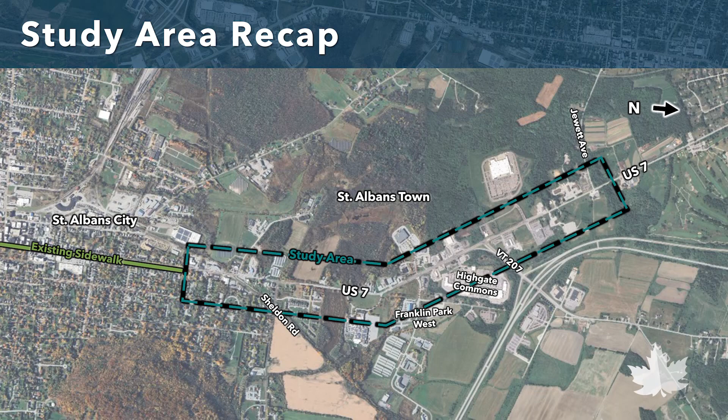The corridor, as likely all of you know, is quite variable along its length. You have dense commercial down here in the southern section as you're coming out of the city, as well as up by Highgate Commons. You have agriculture, lower density in the middle, and then you return to those land uses minus the sizable commercial development of Walmart as you continue north.

So you have a much wider road. The road almost expands and contracts as you continue along. You have a lot of lanes down here, it gets narrowed down to 2 lanes, widens out, multiple lanes, and then concludes getting narrower. So it's a very variable cross-section, and that certainly comes into play when we're looking at what alternatives we are considering for better connectivity and better safety for walkers and bikers.

And so one of the first exercises we like to do is just confirm our understanding of the study, and that's by looking at what the intention of it is. This study came to us and it was called a shared use path scoping study, but it's always important to check and make sure that you're right sizing the facility that you're creating or planning or studying for your active transportation users. One of the quick checks for that is in the national standard for bike facility design.

They have this little table in there, and this is in the AASHTO Bike Guide. The AASHTO Bike Guide is the national standard for bike facility design, and when you think about shared use facilities, it has that overlap with pedestrian facilities as well. So it includes this tiny little table that's based on the volume of cars along your roadway as well as the speed. And when you look at our metrics for Route 7 in the study area, the speed limit is predominantly 35 until it jumps up to 50 once you get north of Walmart.

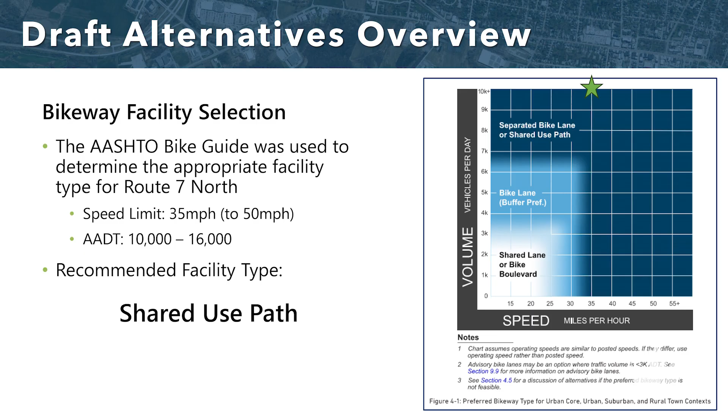And along its length, the AADT, which is basically how many cars there are on average on the road per day, ranges along the study area from 10 to 16,000. So when you use this tiny little table, you go to the 35 miles an hour and you go to the top of it, which says 10,000 plus, and that's putting you firmly in this shared use path or separated bike lane category. So that was just a little check we did to make sure that, yes, along our study area, when we are talking about alternatives, what we're going to be talking about is a shared use path.

For those that might not know necessarily what a shared use path is, if you can picture the MVRT, if you can picture the LVRT, it's generally a minimum of 8-foot wide path that's on an independent right-of-way or immediately parallel to the road, but is by some means separated from the road. It's not a bike lane that's also striped on the pavement. It's not a shared lane where you're biking with traffic. It's on its own alignment, separated from the road, either horizontally or vertically. So that's just a high-level understanding of a shared use path.

And so when we kind of zoomed out and looked end to end, knowing what we were going to be talking about was a shared use facility, we kind of eliminated those alternatives. That would be like, oh, what if we did bike lanes and sidewalks? What if we did just bike lanes? What if we did just sidewalks? None of those quite met that purpose and need and followed along with that table I just shared. And truly, too, to meet the needs of the grant application with the state, it needed to be a shared use facility. You need to accommodate walkers and bikers. So that's how we arrived at the shared use path.

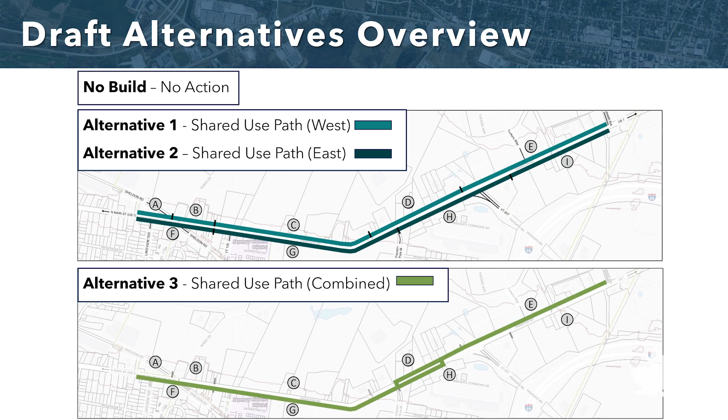And when you look at what is available along the corridor, the other thing was that we were to hopefully travel along Route 7, as that is the most direct route. And so really that made our alternatives analysis somewhat straightforward. We decided we were going to look end to end at what a shared use path along the west side of the road would look like and a shared use path along the east side of the road. So we kind of came up with this segmentation that you'll see in later slides, how it plays out. And then we looked at how a combined alternative would potentially perform relative to the corridor end to end.

So the goal of this exercise is to identify a shared use path separated from motor vehicle traffic that was, generally speaking, the most desirable. And so in terms of desirability, we evaluated these different segments and kind of color-coded them here on the scale of desirability based upon constraints, impacts, and benefits.

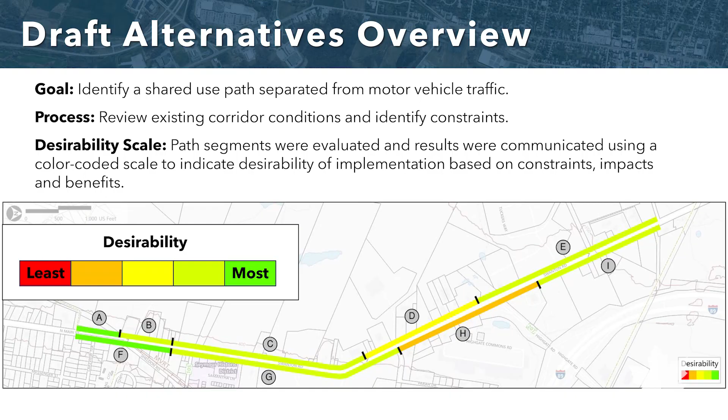So constraints as it pertained to right-of-way, sensitive areas, impacts similarly, minimizing or completely mitigating impacts to right-of-way, always a goal, staying within the public right-of-way, minimizing impacts to natural or cultural resources. So as part of all of these studies too, we do historical resources assessments, we do archaeological resources assessments, we look at those elements, and then we look at the benefits. Are we connecting folks on either side of the road or either end of the corridor to the right things? And based upon what destinations might be on which side of the road, that's certainly paramount in this analysis.

So the first alternative we looked at was an end-to-end shared use path along the west side. And so what I'm going to do on each of these next 3 slides is just kind of walk down and share a high-level look. As I was describing earlier, the corridor is really variable as you move up it, and that's what kind of informed our segmentation of it. And so when we look at these different areas, we've kind of associated a little icon with an image. I apologize if this is a little tricky to see for those in the back. Again, you're welcome to come forward, and I can go back to slides if you want to see a little bit more detail.

But what we noticed in the kind of southern section here was a lot of excess pavement. There are buffered bike lanes on the road in very short segments. We heard in the first meeting that those aren't terribly utilized. It's not that surprising given the speeds along Route 7, given the volumes. While those facilities are there, as I shared in that little table, they're not necessarily the right size facility. So they're a great idea.

It's nice to reallocate that paved space, but because they're not separated from the number of cars that travel along the road and the speed at which they travel, users generally just don't feel safe or comfortable utilizing that facility. So based on the feedback we heard at our first meeting, those are relatively underutilized. And also there's space that, albeit within the public right-of-way, is utilized for parking for local businesses. Obviously something we're always going to be sensitive to, whether or not it is in private or public right-of-way, something worth being sensitive to.

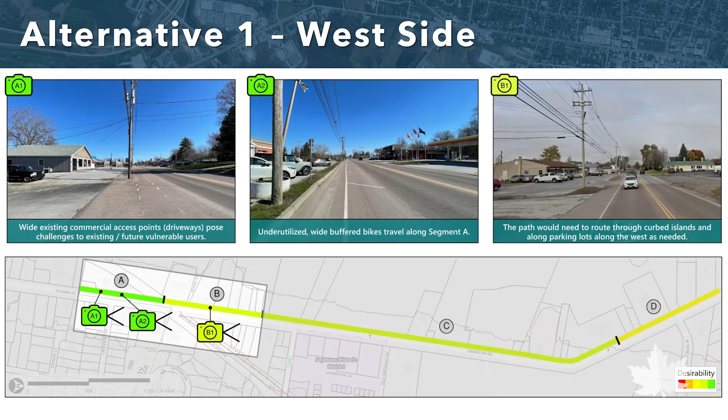And then just looking at the utilities in the area, there's above-ground utility poles down this whole section. So how can we fit the path here by reallocating roadway space or minimizing impacts to those utilities or the kind of the uses of the right-of-way outside of the road? So that was the challenge in that southernmost section.

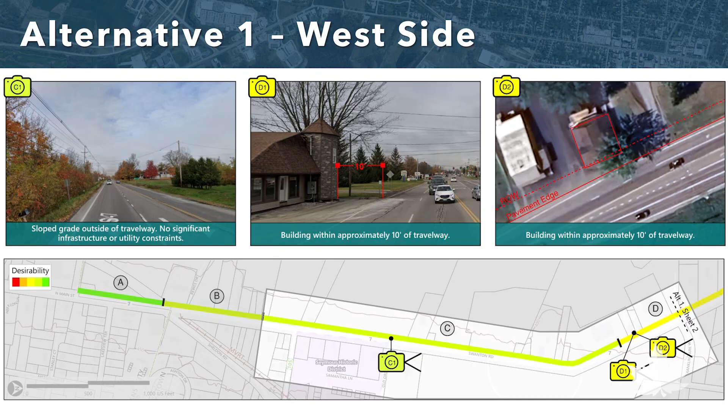In the middle section here, the roadway changes quite a bit. We go down to a 2-lane section with the exception of the 105 intersection where we do have a left turn lane, so it's a 3 travel lane section. Narrower roadway, narrower shoulders. There are some encroachments very, very close to, if not within the public right-of-way. Generally speaking, buildings are not something you'll see that close to a right-of-way line, but that's obviously something we are not going to move. So something to be sensitive to as we consider a west side path that stood out to us.

Again, just little snapshots along the corridor because at this point in a study, the goal is not to design a facility, it's to investigate and evaluate a facility. So those are a couple of the notes we made. There's a lot of ditching through this section on both the east and the west side of the road to just kind of accommodate stormwater and transfer it to the west side of the road.

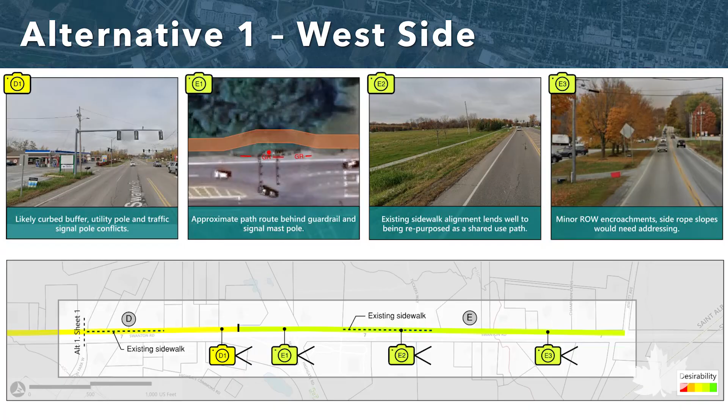Continuing north, kind of looking up into Highgate Commons, that 207 intersection. We have a little bit more space when we get north of 207 relative to different pieces of infrastructure, the right-of-way. At the 207 intersection, we obviously have traffic signal infrastructure. We have a lot of utilities, signal poles, driveways through this section where we have this first image. Something to be mindful of for that west side, how many cars are going to be turning in to access these commercial destinations, these local businesses, and crossing a shared use facility.

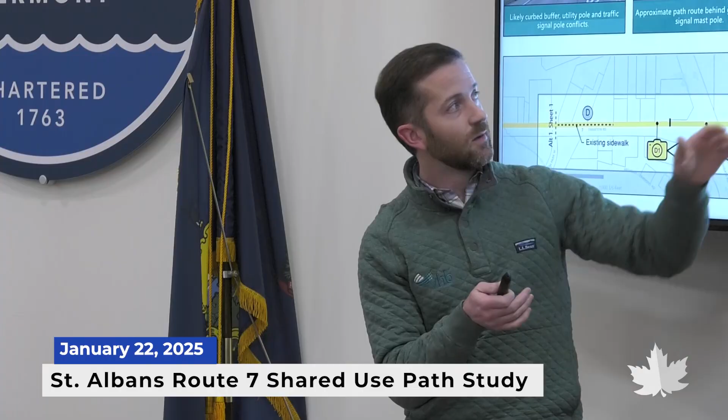What happens when we get north of all this and that land use context kind of transitions back to a little bit more rural? We get a little bit more space. The Walmart development built a sidewalk when that was constructed. And then what are we looking at as we continue even further north? An even narrower roadway. Same concerns though, utilities, trees, etc.

So what does all that mean when you're thinking about putting a shared use path along those sections? We develop these visualizations to really kind of put into place what we're talking about here. So this shared use facility, again, we have it shown to scale here at 12 feet. It's important to note that the width of that can vary.

So if the project were to get funded to move into engineering design, the width of the path is always something that they consider. Can it be narrowed to like a minimum of 10 feet if there's a sensitive resource or a potential sensitive property impact? Could we shift it around a utility pole to avoid a relocation? Those are all things that are a little bit further down the road, when you're into engineering design and you're considering impacts to existing elements of the right-of-way.

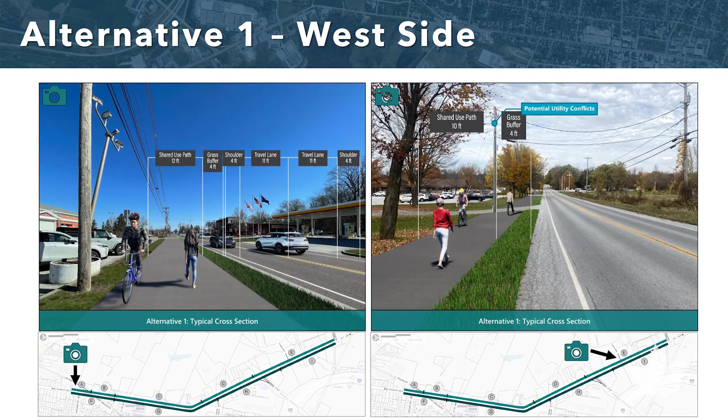And so this snapshot down here is right in the southern end of the property, right in front of the Hungerford Plaza, approaching the old newspaper building and the MVRT crossing, just right up here. You can actually kind of see a little warning sign right there just to place yourselves.

And then more up in the north here, we're pretty close to the northern end of our section. You can see here we've called for a narrower path just because of the number of trees up here, the utility poles, all things that, again, will be considered if the project were to advance with a preferred alternative. But just looking at, can we maintain that acceptable width of the shared use path, that separation from the roadway, and still successfully and reasonably, feasibly say a shared use path could work here. So that was alternative one.

Alternative two, same kind of typical section with a separation from the road, looking at the same sort of things along the east side. So very similarly to the west side option, the east side, in the southern section here, would be existing within what we call curb to curb. So you can picture that as the existing roadway. That's what we would seek to do there. As we continue north, looking at, what is access to businesses like through these areas?

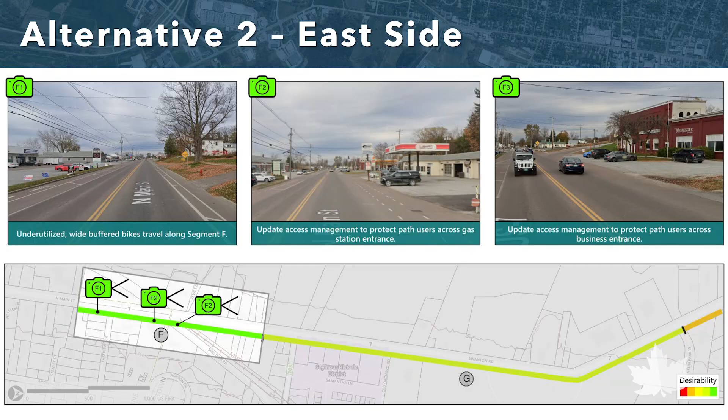Are there a lot of driveways? Are there a lot of intersections? This Sheldon Road intersection, it's known that there's a fairly high speed movement made off of that. How can we plan around that? Not really something we look at here, something that would get more into engineering design, but just something to be mindful of and identify as a potential constraint through here.

The connection to the MVRT, really nice for something like an east side path if you're coming up from the city and you can just jump right on that, staying on the same side of the road. Potential benefit of the east side option through here. Continuing north, more the same, not too much variability in this middle section between both options, where you have very similar adjacent land uses. And on the west side down here, you have a few additional private properties before you get into more large-scale lots.

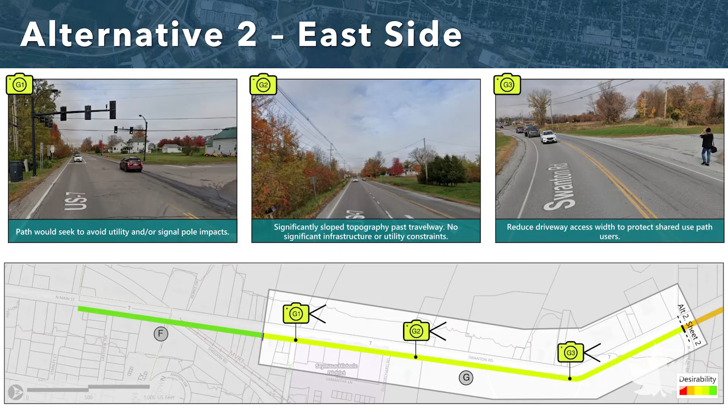Similarly, on the right side here, you have a few additional properties. You also have the historic district down here. And then as you transition north, you come up on Franklin Park West. It's a lot of the same. It's a little bit more open space, a little bit more kind of user-friendly when you're considering constructing something along the side of the road.

I have a question. When you get to the previous slide, that one and the one before it, the road's only 2 lanes wide at that point. Is there any consideration in your alternatives to the likelihood that the development will be out in that end of town, which means the road will probably double in width, 2 lanes on both sides, or to the city? No, that was not a consideration with this. The study did not get into traffic. That would be a recommendation for any future development.

We also heard at our first local concerns meeting in the southern section, the amount of pavement out here allows for some illegal passing of left-turning vehicles, so it almost functions as if there's a two-way left turn lane going down the middle of the road, even though there's not. So if somebody needs to turn left and there's traffic coming the opposite direction, cars will just utilize the bike lanes to bypass that left turner.

So somebody recommended potentially looking at traffic in the sense of, could you fit both the shared use path and a two-way left turn lane along Route 7 here, such that you could allow a left-turning driver to pull out of traffic to make their maneuver. So that's going to be a recommendation going forward.

As far as the traffic that might come from the new development of Franklin Park West, that was not a consideration of the study. I would assume the developer for that effort would need to do what's called a traffic impact study, and they would need to make sure that if additional mitigations are required due to increased traffic volumes, they are accommodating those as part of their development effort. So this would be very separate from that.

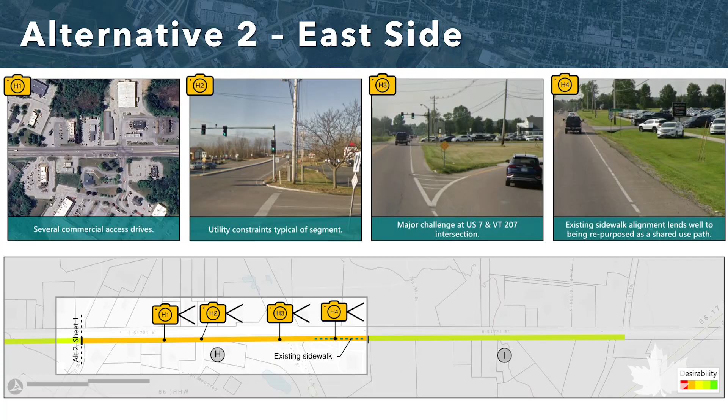Continuing north of that, however, the 207 intersection and the way it's currently configured, we see as a potential sizable hurdle to an east side option, and that'll come out when we looked at the combined option. But high speed, high volume interchange, treated for all intents and purposes like an interstate on-ramp. Something we would want to be mindful of. Crossing that with walkers and bikers, I think, would be very uncomfortable for both drivers and walkers and bikers. So something we want to be mindful of there.

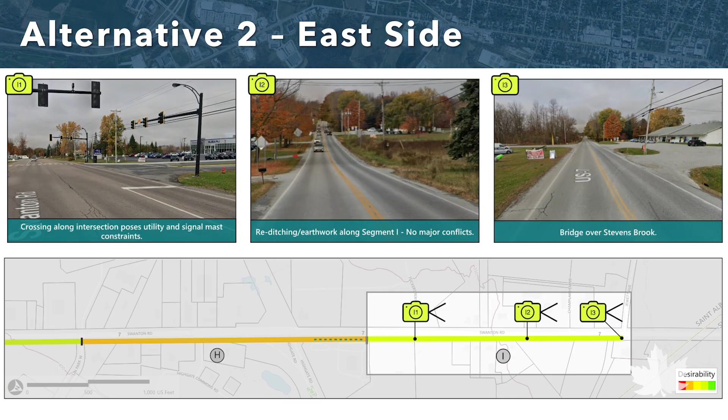And then just continuing north of this, you get similar land use context on both sides of the road. You have the auto dealership on the east side, similar to the Walmart being on the west side. But then continuing north, again, similar cases on both sides of the road. North of here, we really assessed both with the same desirability ranking and the same considerations for both an east side and a west side path.

So similar to alternative one, we took a look at, all right, just visualizing planting a shared use path on both sides of the road in this location. I just realized this is actually mislabeled. This should be more like up here, so apologies about that. So ignore the camera being there, pretend it's here, because that's your dealership and your Walmart on the side there.

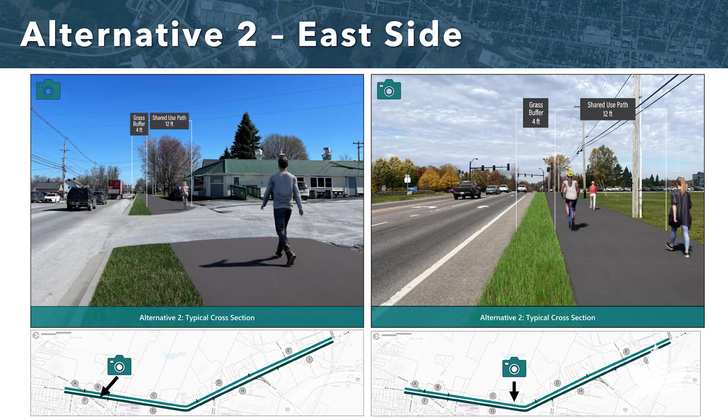But then this down here at the Maple City Diner, what a shared use path concept could look like on the east side of the road here, crossing that driveway into that local business, and then similarly what a 12-foot wide shared use path in the north section would look like relative to the traffic lanes. Same thing down here relative to the existing space that it would be kind of inserted into.

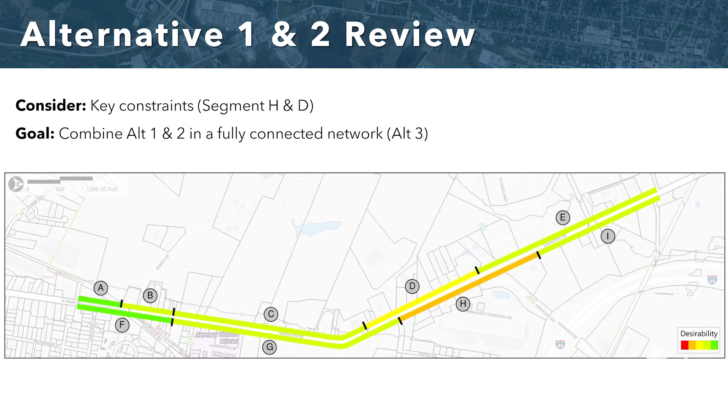So after we did that exercise, we looked at the desirability ratings of both, and we see very similar up to this northern middle section, and then very similar north of that. So that Highgate Commons 207 intersection area really stood out to us. You can see down here in the southern section, both fairly the same, because we do think there's going to be opportunity to reallocate the paved roadway space.

Similar through here, similar context on both sides of the road, sensitivity to close parallel parcels to the roadway here. Similar through here, then you get the Highgate Commons destination / 207 intersection. If you wanted to make that even more red, we see that as a significant hurdle, and then fairly similar transition north there.

So when we matched those up, we said, all right, for the sake of really doing a full alternatives analysis, we should consider a combined alternative where the path travels along one side of the road for a good bit of distance, and then is it sensible to switch to the other side of the road to minimize impacts, to maximize connectivity and user safety, all things that we talked about.

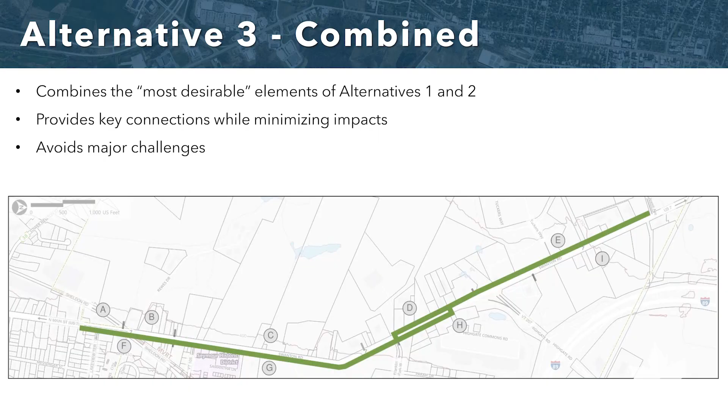And so when we looked at a third alternative, we liked the east side up until that 207 intersection, and that was twofold. One, to get you to the new Franklin Park West development, to get you to the Highgate Commons Plaza, and then looking at crossing over to the west side of the road, seeing how north of this area, both alternatives had equal desirability rankings, but a transition here avoids that 207 interchange, and we saw that as being the best option for walkers, bikers, and drivers. So alternative 3 we liked.

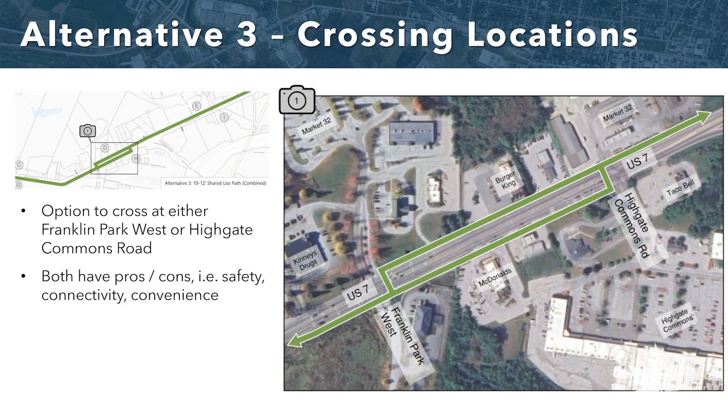We'd love to hear some input on a potential crossing location among these two. Maybe we have a short segment where a shared use path does exist on both sides of the road. I think we didn't want to rule one or the other out. We are, again, just studying. We're not making any final decisions here.

We like the idea of continuing up to Highgate Commons to provide users access to that development. But we also heard feedback that this intersection is very big and very busy and could be potentially intimidating to users of a shared use path. So should we consider a crossing back here at Franklin Park West? So we looked at both of those, as well as providing that connectivity to Market 32 down here was desirable.

So looking at those crossing points, both up in the air, again, worth noting, this is a study. This is a planning study. So we're here to hear from you. We're here to present the options to you and the information that we have learned from looking into these, and hear from you as to what is going to be the most desirable option.

So, as is standard operating procedure with any sort of alternative development, you then need to look at them side by side, and we did that via these evaluation matrices. So we created 3 different evaluation matrices: traffic considerations, community character impacts, and expected resource impacts. We looked at all those, and you go side by side down the line here. You also always consider a no-build alternative, which generally makes our jobs pretty easy. Because if you don't do anything, then a lot of the things aren't going to change, and it's really not going to meet the purpose and need of the study.

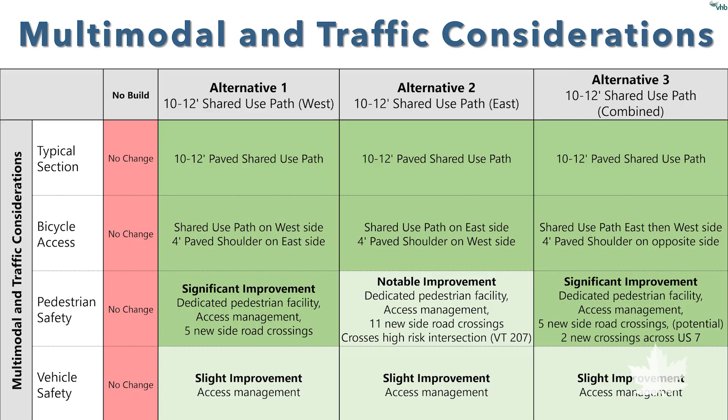So we looked at, again, the same sort of alternative along one side of the road or the other versus the combined. We assessed the impacts to bicycle access, the impacts to pedestrian access and safety, and the impacts to vehicle safety. As far as safety and access for what we call active transportation modes, i.e. walking and biking, both have significant improvements.

We did look at the number of side road crossings for each alternative. You can see there's a bit more if you go end to end on the east side, but you mitigate some of that in alternative 3 if you were to do the combined option there.